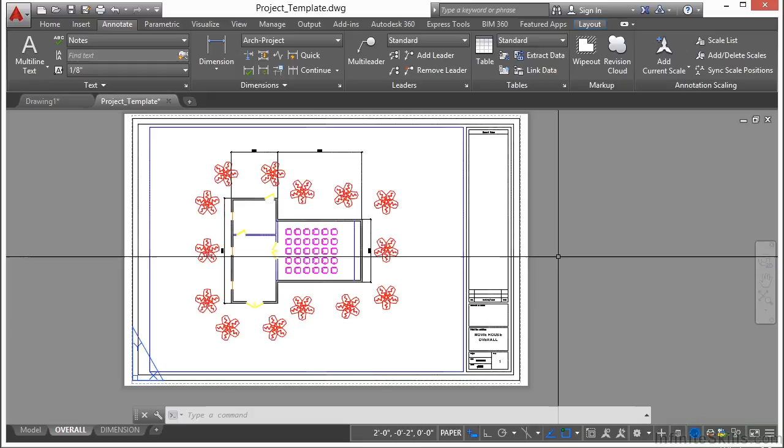We've created our model, put in our accessories and plants, and created our first drawing. Now let's create our second and last drawing.

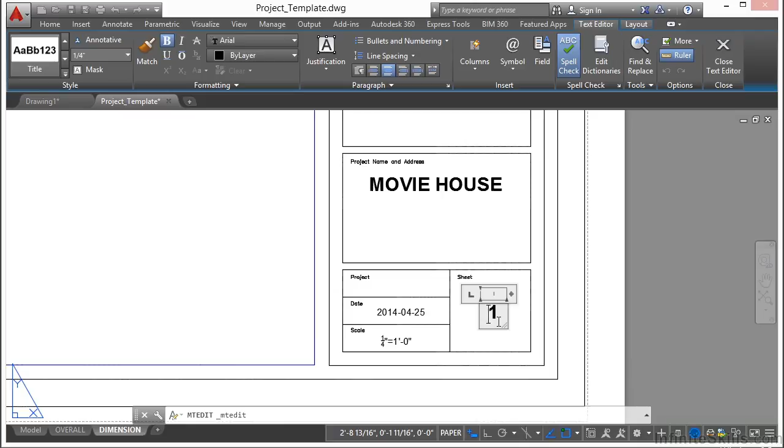The Paper Space tab is already here for us, and we're going to draw in some dimensions. There are a few things I don't want to show in this drawing, but before we start, I'm going to change this: double-click the text, delete the number 1, and make this sheet number 2.

Activate this viewport by double-clicking inside it. Go to the Home tab, Layers panel, click on the snowflake - that's the freeze - and let's freeze the plants, freeze the footing layer, and freeze these chairs. I just want to dimension the location of the doors, windows, and walls.

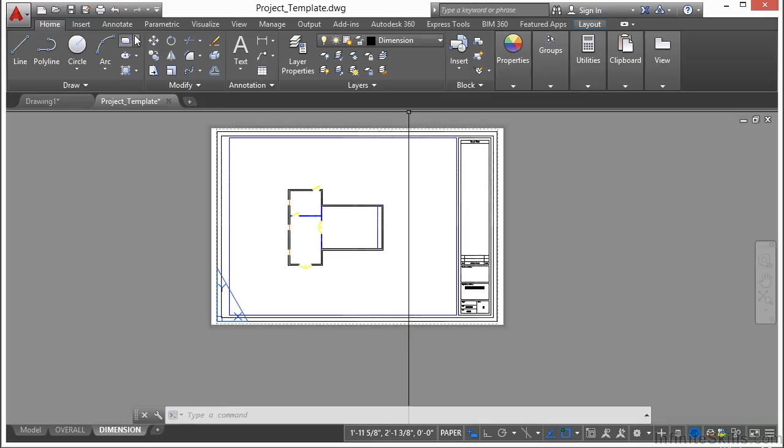Double-click outside of that viewport to turn it off. Now we're on the dimension layer still, so that's fantastic. Go to Annotate and the dimension.

So we're going to create a few dimensions here. Let's start on this outside wall. Select there and dimension to our window, 4'10". Now we're going to continue, and it picks up where we left off. Click that point. We're going to go all the way down the wall.

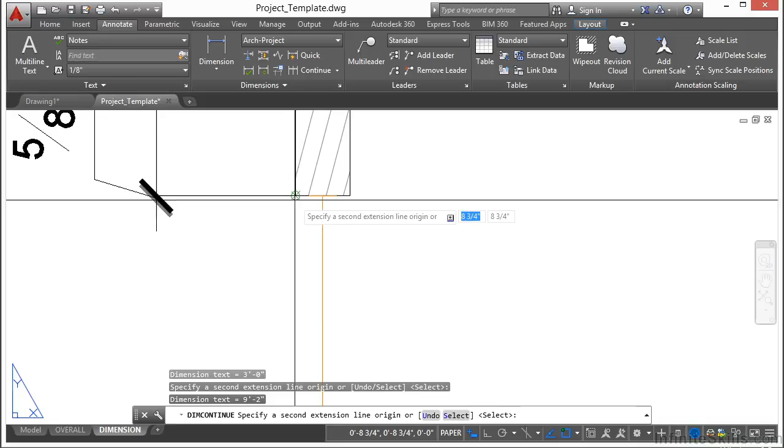I'm just zooming out, panning a little, and then zooming in, repeating as needed. When I'm finished, I press Enter, then press Enter again to fully cancel out. So now we've located all of the doors and windows for that side of the wall.

Let's put in an overall dimension. Start the dimension command again. Click on that same point, click on this endpoint, and put that dimension in there.

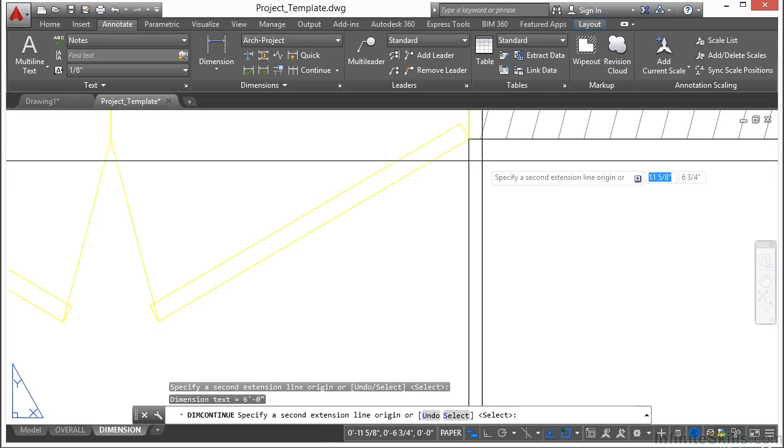Let's do something similar here on the bottom. Start the dimension command again, dimension to the door, and then continue. There's that one. Now let's do the top.

Dimension to that point, the first part of the door. Pull your dimension up here and continue.

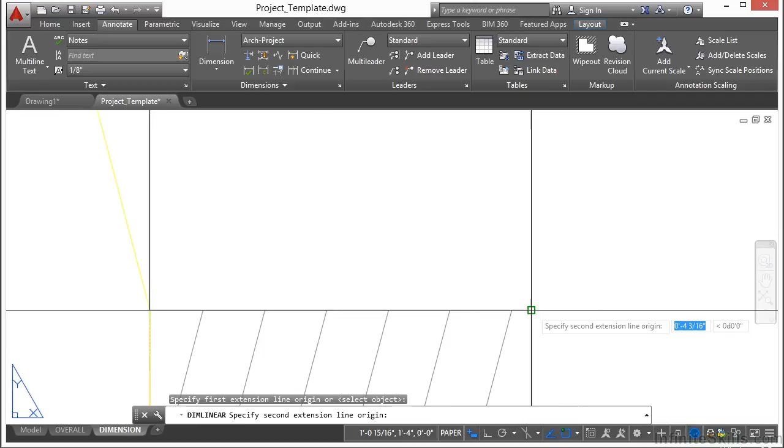Now you can see here, we're repeating a lot of the same steps over and over again. That's okay. Start the dimension command. Click here - we want an overall dimension of this section. Bring that up and let's continue on, and let's locate the end of that wall.

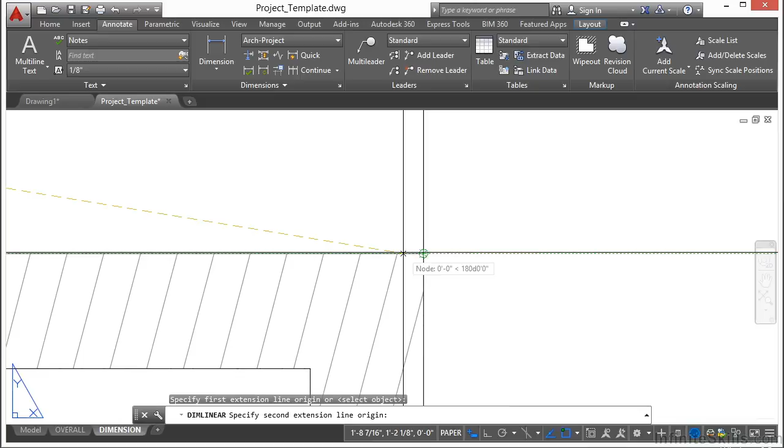Now I want to put an overall dimension for the entire length here of the building. Start the dimension command, click on this endpoint here, then zoom in down to there and click on the endpoint here.

If you have any trouble with your Osnaps getting to the right snap location, don't forget you can manually type them in. Put that dimension right there. Perfect.

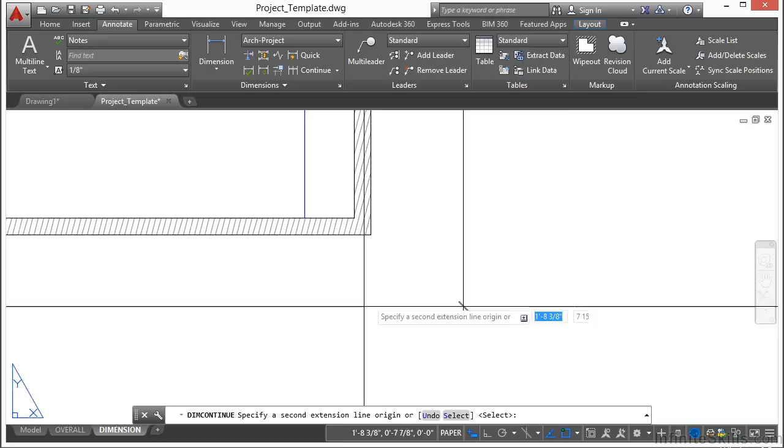Let's put in this dimension here now. Dimension to that endpoint, dimension to this endpoint. We're going to stretch it out to the right, continue down, and snap to there. Fantastic - that's all of our external line work that we have dimensioned out.

Now we need to do some of the internal, and we're nearly complete. Start the dimension command again. Pick that endpoint, and just pick up here - parallel's fine - locates that wall for us.

Let's locate this wall here, enter into these endpoints. Now we know where that is.

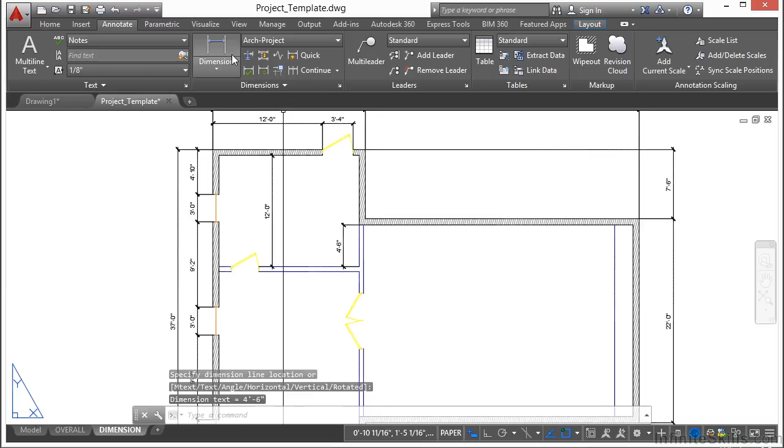And we need to know where this door is here as well. So we're going to start from this point, click to that point, stretch out our dimension, continue on, and dimension the doorway.

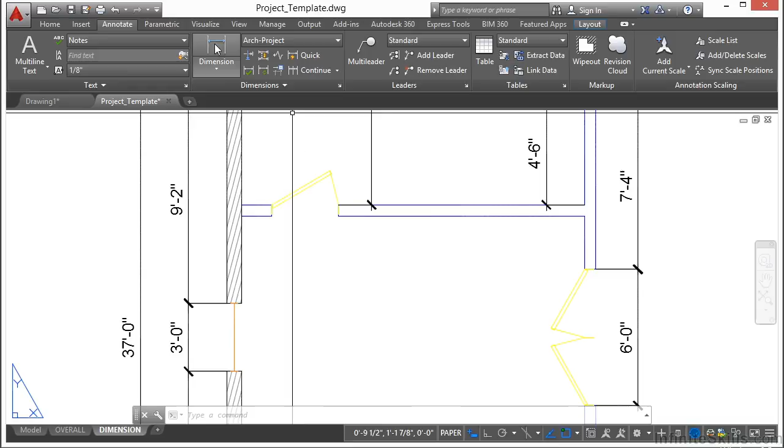Now we need to locate this last door. Start the dimension command, dimension this section here, then continue on, dimension there, and enter. Enter again to finish. Now I see here that this dimension is kind of in the way, so we're

going to stretch it down that way and stack it. Now we can see it.

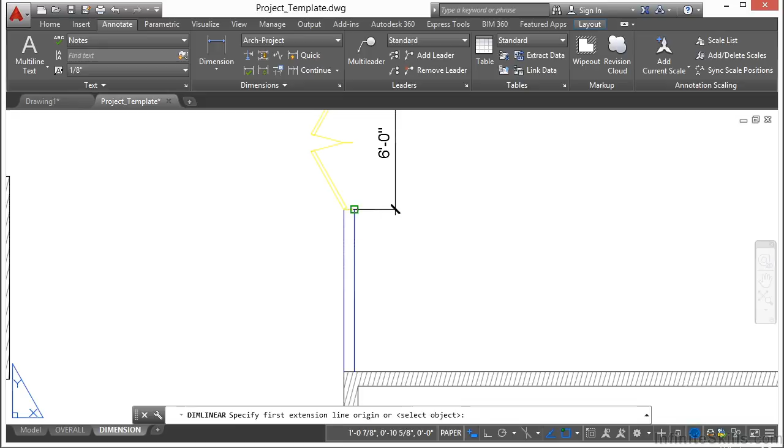Last thing that we need to do is dimension where this line is at. So I'm going to grab my dimension command, pick this endpoint, pick a parallel point, and we have the 27-foot 6-inch dimension. So here we are.

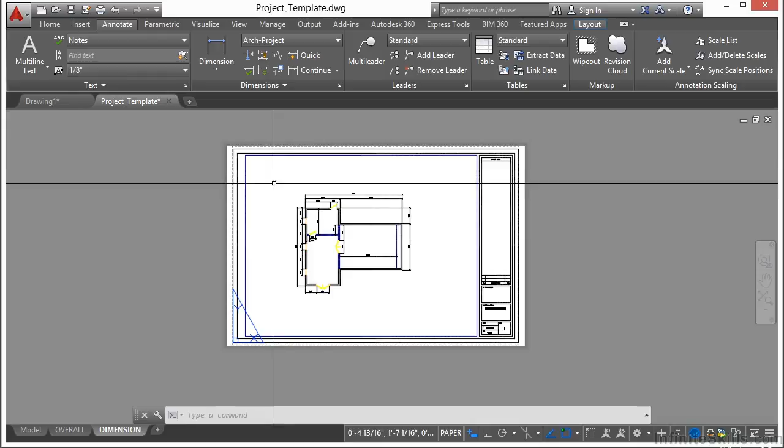We now have our fully dimensioned model. This gives us all the information that we need to draw these walls, locate the windows, and the doors. Now we have a full set of drawings - a nice overall site plan and a fully dimensioned set of drawings as well. Both have been title blocked, labeled, and have a drawing number in them. And that is essentially how you make a drawing in AutoCAD.